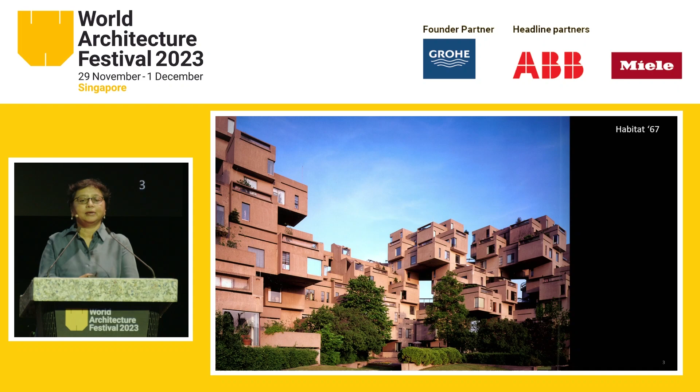We've been known since the early 1960s, when Moshe Safdie designed Habitat 67. We've designed many projects since then, convention centers, museums, big buildings, mega structures. All of them have been landmark projects, including our own Marina Bay Sands and Jewel.

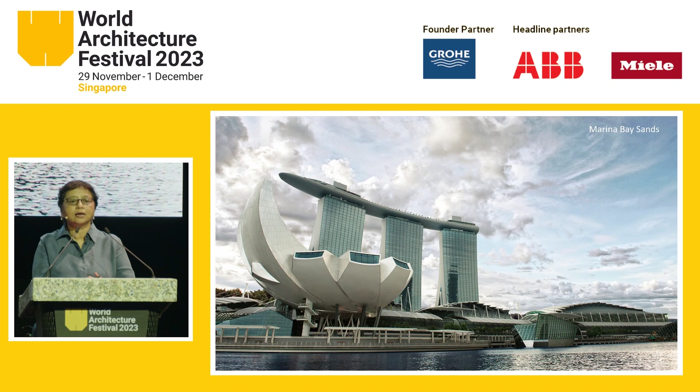I've been involved in many of these projects, and I can tell you, designing iconic projects is a real misconception. Because as you all know, clients come to us and say, hey, can you give us some wow spaces? Can you give us some Instagrammable spaces? Because that's now the in thing.

What we realize is that you can't really start designing by saying, I'm going to create this Instagrammable space. We are all architects and designers here, we know that when people come to us, they give us their design program. But if you think about it, that's such a single-dimensional information, because it's only their needs and requirements. That's a great starting point for design, but if you start with just that, you're going to get very limited.

So this is where I always think, what makes a building iconic? What is iconic anyway?

We always say, whenever you get something from the client, you have to take a pause. And what that pause means is you have to think about whatever you're going to design, how does that impact the land, how does that impact the environment, how does that impact the community. You have to really think more beyond the requirements. For us, it's almost an opportunity to come up with something innovative, to think outside the box, to think about more than what the functional requirements are.

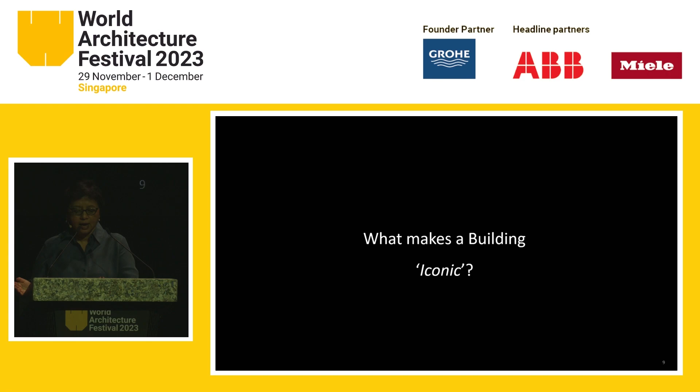And that has often led to very innovative solutions, even getting away from traditional design, coming up with new building typology, like what we did at Jewel Changi Airport.

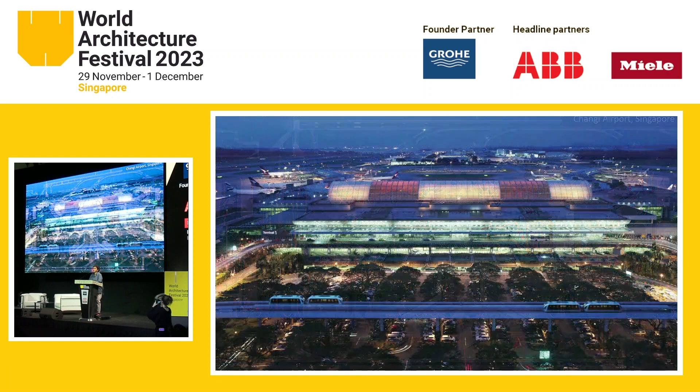At Jewel, the site was very tight. It was located in the heart of the airport, between the control tower, that's the red dot that you see, and Terminal 1. It was an open air car park with the train running through it. The train could not be moved, could not be changed.

Even though it was very challenging to design such a program for this tight site, we thought of the community, and we wanted to create a timeless attraction, an attraction which would be very natural, an attraction that would be loved by all.

We created this amazing garden around a waterfall. This garden is open to the public, open to the community 24 hours. There's no advertisement of that sort, it's a very pure garden.

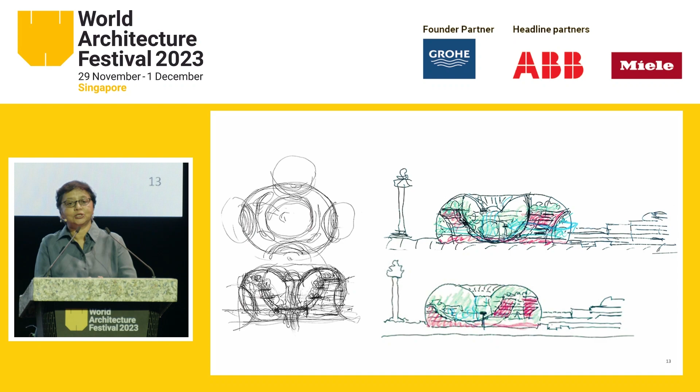The waterfall created new challenges for us. This was our ambition, but the waterfall created new challenges. The toroid structure could not be symmetrical, to avoid the water falling on the train.

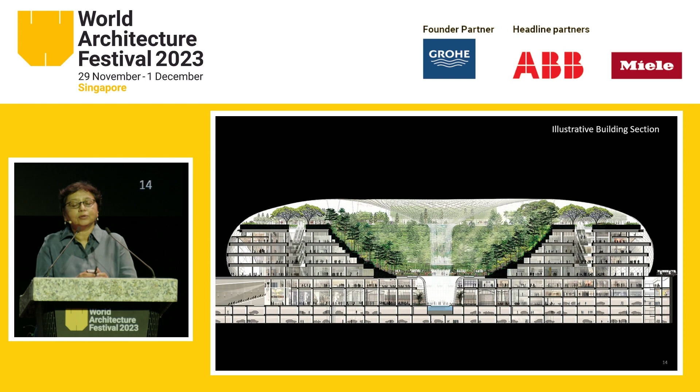We worked with our engineers at Buro Happold. They helped us rationalize the geometry, coming up with a beautiful, light, thin grid shell structure that could cover the space and the planting. We worked with environmental engineers to design the comfort for human beings, for the trees, and for the spaces underneath.

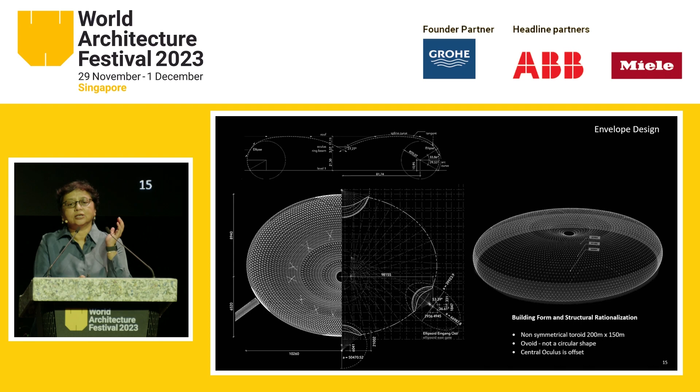The reason I'm telling you all these things is because you cannot do these projects in isolation. It's always teamwork. We work with the best engineers to come up with solutions that really help us solve the problems and come up with innovative ideas.

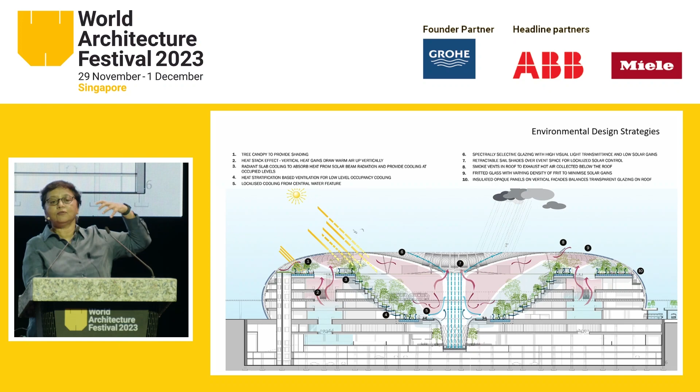Our environmental engineers also helped us map the sunlight, the daylight that would come into the building. That informed our landscape architects' selection of trees, what kind should be located where. At the top, we have canopy trees where there's a lot of light. In the forest valley, the little bowl that we created, we have tall trees allowing light to come through.

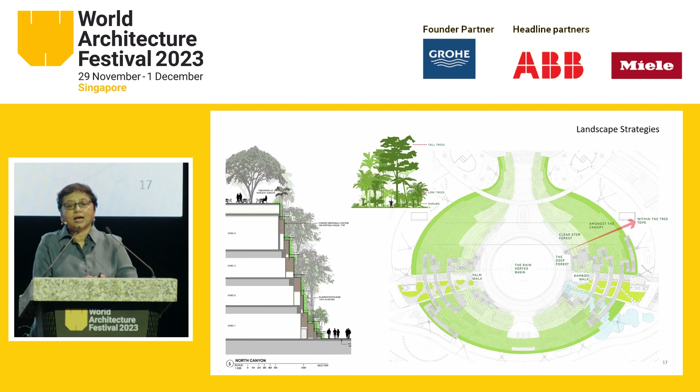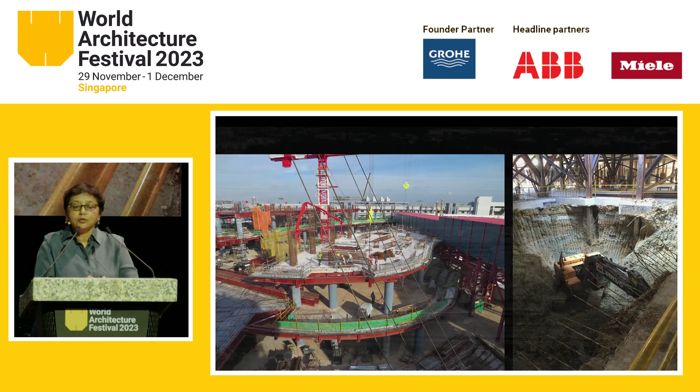Even though it was always a stressful process during construction, we always had this feeling that this was going to be something very special. We were building and designing something that was very unique. My team and I would go to the site every single day and really marvel at what we were creating, and even during the stressful process, there were moments of wonder watching everything coming together.

I would enthusiastically send progress pictures to Moshe in Boston to show what we were doing. And we were really eagerly waiting for the project to open, because until then it was just about us and our building.

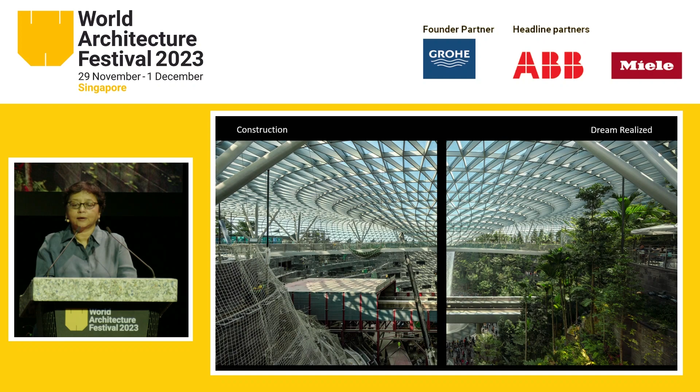We challenged the notion of an airport. We brought in nature in a public space in the center of an airport. This garden that you see is something that was never thought of. Changi never thought that we would have a garden inside the building. In the middle of the airport, we've created a community space.

This garden is not just a display of plants, a botanic garden, but it is a garden of wonder and grandeur. It has introduced people to the wonder of plant life. This garden and the waterfall inside really create this amazing serene atmosphere, which is unheard of.

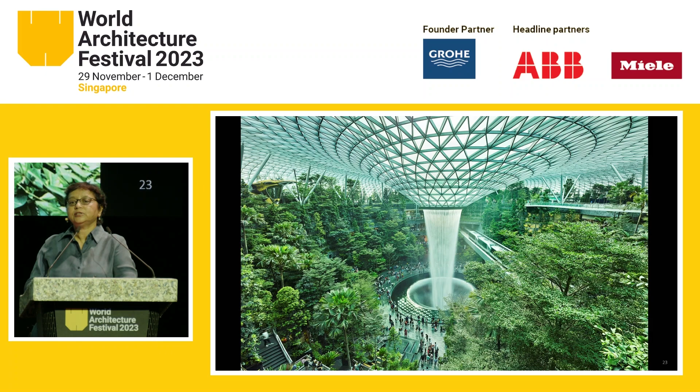This is a new typology that we've created, where landside aviation facilities, retail areas, and an attraction come together. We eagerly waited for this day to open.

And what we saw was amazing. This is the first building thing that people see when they approach the airport. When you come into Terminal 1, this is the first view that you get. And that itself has formed a new gateway to Singapore.

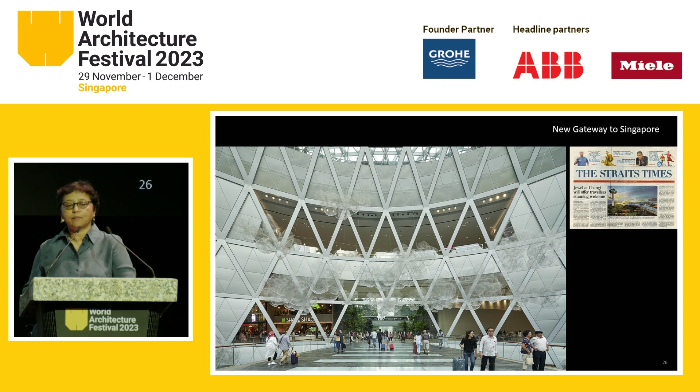I really remember when the building opened and thousands of people flocked inside the airport. They were taking pictures, and they were just marveling at what they were seeing. And we did anticipate that, because we've created something special.

We anticipated people to be very impressed by the scale, impressed by the surroundings. But what I did not anticipate was how this building would impact the people, how it would resonate, the space would resonate with people. It created a sense of wonder.

There was a joy on everybody's face. It's almost like it's not just that day—I've been seeing it over time. And it really has created a generational happiness.

When you see this light coming down from the sky, filtering through the trees, when you see the water falling from the oculus above, it's like rain. It's like being outdoors, not an indoor garden. And it's a magical moment when you see a rainbow in the water.

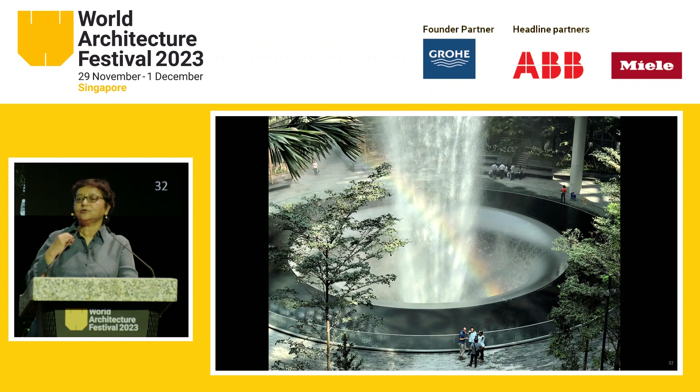You forget you're at an airport. And this is something that I've seen on people's faces. The space completely changes in the evening, becomes a magic wonderland.

Travelers are taking extra time to come to the airport, relaxing, and getting rejuvenated just visiting the place. Of course, locals are enthralled. The locals are so happy with whatever the space has to offer.

And it's heartwarming, really, to see people in wheelchairs, senior citizens enjoying the garden and really sitting peacefully. And I've heard them say that it feels as if the project has been crafted for their needs, because their families don't have to worry about them.

To the point that a few years ago, the New York Times wrote an article saying that people should spend a day vacationing at Jewel. I mean, that's what the impact has been on people.

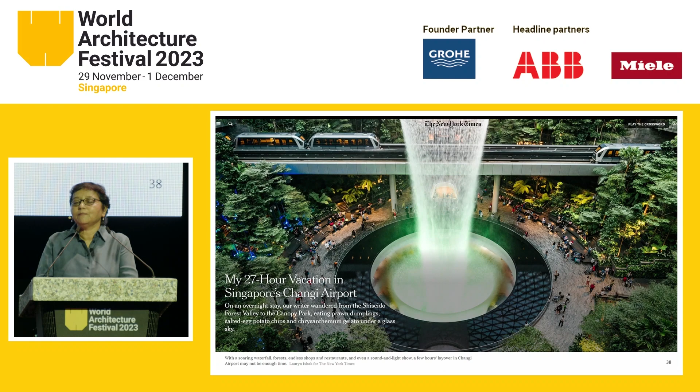Even today, people and the community have made it their icon. It has become their symbol—symbol of Singapore, symbol of the airport.

You might say, hey, it's a very special structure with special needs. So how do you create something like that, something where people feel that they belong to the space, on big projects—especially if the project has theaters, casinos, convention centers, and hotels—a mega project?

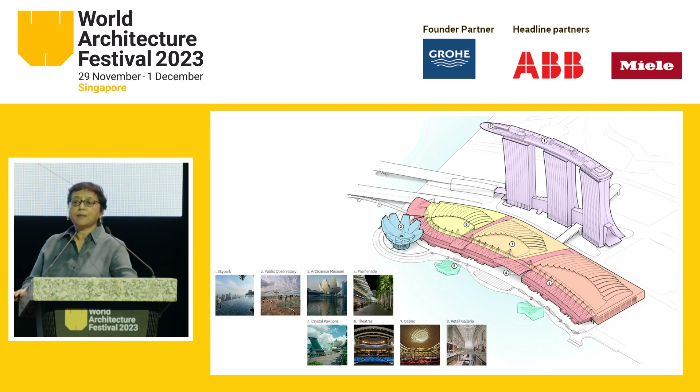Marina Bay Sands is an example of that project. Marina Bay Sands is a great example of integrated urban planning and architecture. It is a microcosm of a city.

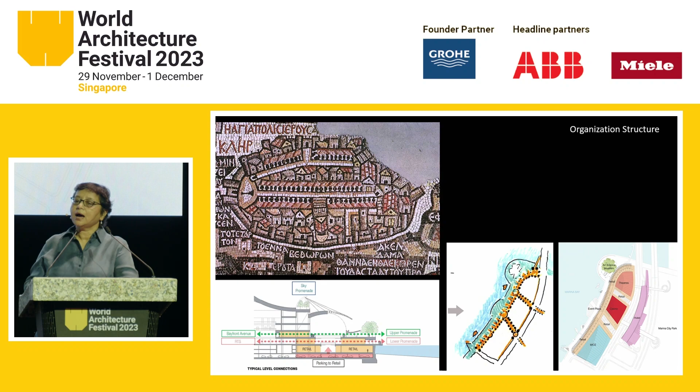We've been inspired by the concept of Roman spinal cities. The commercial hub of Marina Bay Sands, which is the casino, the theaters, the convention center, and the related spaces, are self-orienting. Our design seamlessly integrates the spaces with the surrounding urban environment, extending the city life both within the building and around the building.

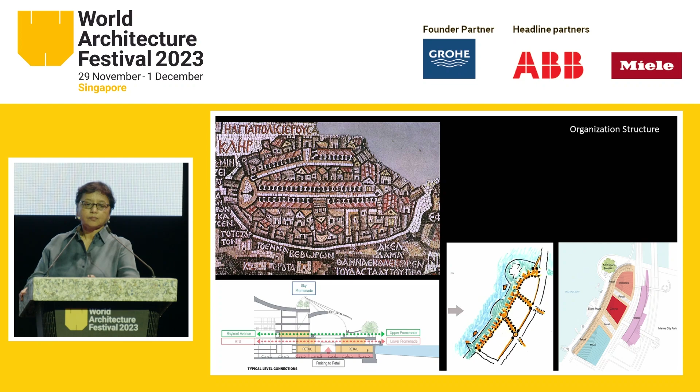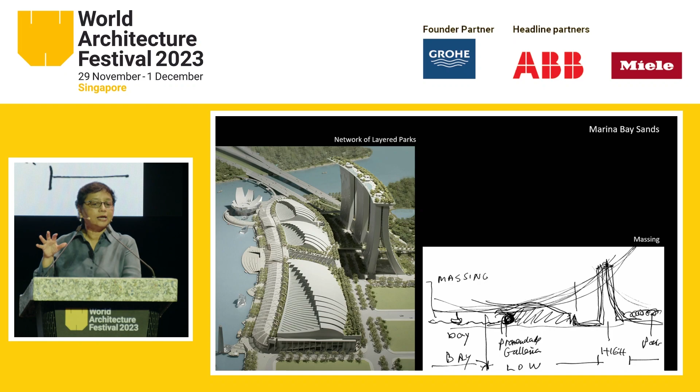The massing configuration of these facilities really creates a three-dimensional hierarchy, addressing the issue of mega scale, and creates an urban landscape that relates to human scale.

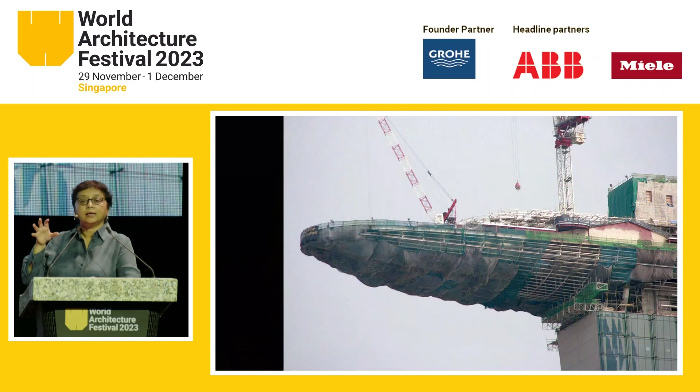When we started the construction, even we were overwhelmed. We had worked on this project for a year, and we were overwhelmed by the sheer scale of it. I often wondered what people would think of it, even though we had designed it in a way that could relate to human scale by separating these buildings, by creating these independent structures.

But since the day it opened, over time, Marina Bay Sands and its public spaces have been seamlessly integrated into Singaporeans' lives. It attracts both locals and tourists. We designed public spaces integral with the architecture, integrated with landscape and natural light. These are spaces where people come in, Singaporeans and tourists, a gathering place for day and night with various activities and attractions.

The waterfront promenade is one of the spaces. The design was such that the adjoining buildings you see were always lower in scale, for really connecting with people, and transparent, so that the inside retail mall and the outside promenade would be one.

This space is so popular. Whether it's hot sun or raining, people come over here. They flock together - it's almost like a gathering place for families. People come here and relax. There are joggers, bicyclists, using the space to really connect. It connects well to the city.

In the evening, it's a completely different space. It transforms into a hub where locals and tourists come and enjoy the various food offerings and attractions. We had never anticipated movie premieres in the space. There are fashion shows, there are durian parties. Even the ArtScience Museum, with its sculptural form, is used for projecting digital displays.

The art pieces, like Ned Kahn's Vortex, are very popular. People are mesmerized by seeing the swirling water. It is kind of a place to be - you see families sitting, relaxing, looking at the stunning Singapore skyline.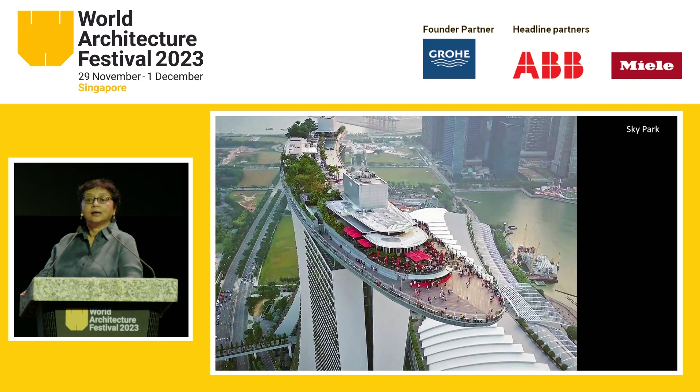In addition to this, we created another public space, the Sky Park - a 2.5-acre public space in the sky. The swimming pool, the observation deck, all these spaces are loved by everyone. The swimming pool, 150 meters long, spans from Tower 1 to Tower 3, and is the biggest attraction. People from all over come here just with the aim of swimming in that pool.

At sunset, finding a spot in the bustling crowd is a problem. It becomes a challenge, right? People wait for hours together just to capture the color of the day, color of the evenings, of the sky. It's worth the wait - it's a magical transformation to see the change in the cityscape.

It's really my favorite time to visit the Sky Park. Whether you're there looking at the lights of the city, or to take pictures of the fireworks, it's a must-see place. If you look at all tourist books and guides, it's a must-visit place, and I think that's what's made it very successful.

People love being there. People feel that it's their space, because you don't even have to be a hotel guest to go and see the observation deck. And who would have imagined, really, doing yoga in the sky?

This Sky Park has changed the way Singapore thinks about rooftops. It has been a game changer, really, to see how people could use spaces in the sky, which otherwise were taken up by mechanical equipment and other things.

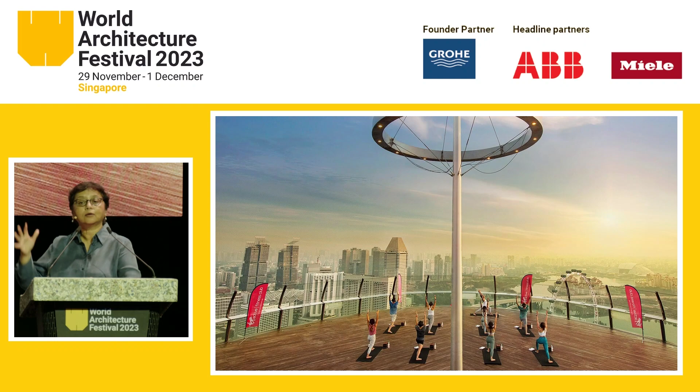Marina Bay Sands, as you all know, is a global phenomenon around the world and known as a symbol of Singapore. It's also an example of how architecture can be a catalyst for economic growth and change.

These are all commercial projects. There is a case - I was talking to a friend, and he said, oh, it's easy because these are commercial projects, you can create public spaces. His logic was that you can convince developers - maybe it's easier to convince developers to say, why can't we include some public space? It's going to increase the footfall, help you financially, and help get more people into the mall.

But as architects and designers, when we work in cities like Singapore, which are densely populated, it is important that we create something beyond what we have been given. It is important that we think about the community, the neighborhood. And that's exactly what we did for our office building, a headquarters for a local Singaporean company, Surbana Jurong.

They chose a site away from the CBD area for the headquarters. We created a dynamic anchor project for the Jurong Eco District, Innovation District, intended for both the employees and the surrounding neighborhood and the big community. The whole idea was to foster a getting together of people.

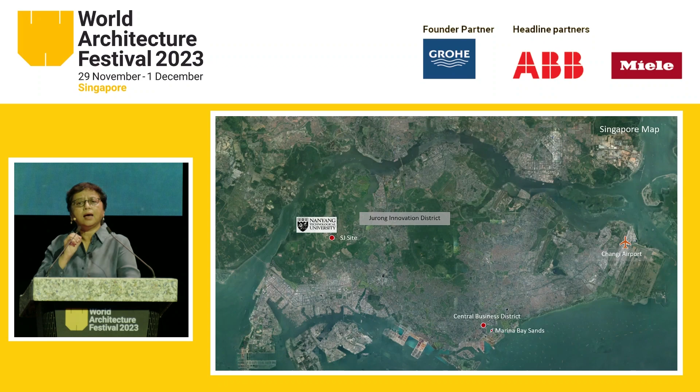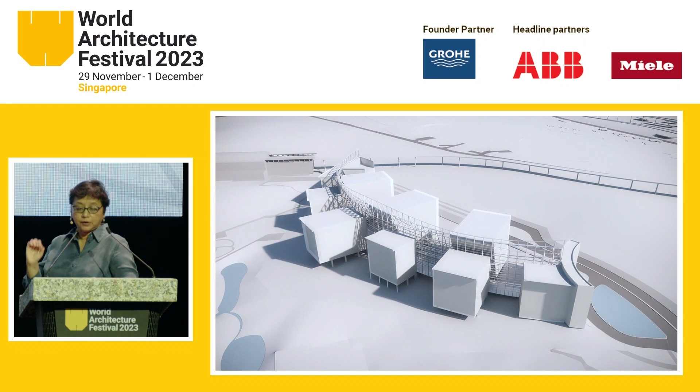The whole idea was allowing people, allowing the community to go through your building. We created a spine, a central spine that forms a direct connection between the train station you see over there, a public train station, and the neighboring community. It's a public street. This spine also connects the different office blocks and interweaves exterior gardens and interior gardens.

What you're seeing over here, there's something called the Eco Garden that already exists. So what we did was we brought the garden into our building. This clustering of medium-sized volumes around the spine really evokes almost an atmosphere of a village.

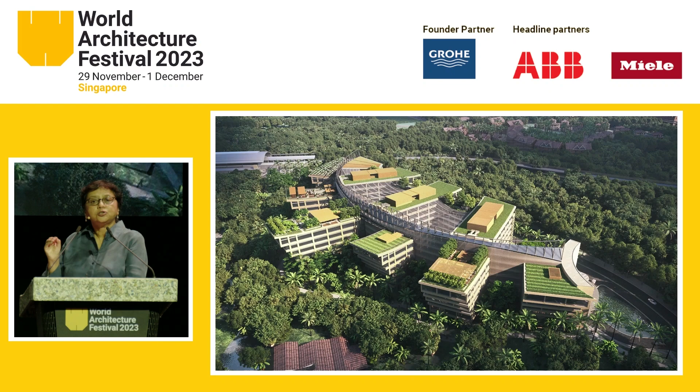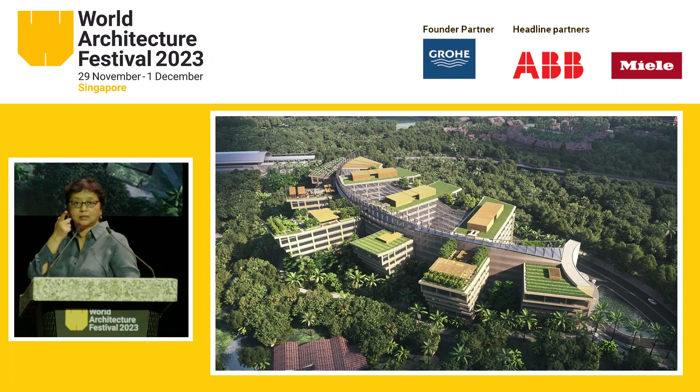It's a contrast to what people think of headquarters. Headquarters generally in Singapore are offices located in tall towers in the CBD area, in the dense, central business district. Our building is simple. Our building is something that has been there.

This is welcoming. This just opened 6 months ago. They welcomed the residents 6 months ago.

We designed the elevations that could relate to the future projects. Since this is a pioneer project in that area, we designed the western elevation to relate to the future projects over there, while the eastern cantilevered blocks, the stacking of the blocks, allows gardens to penetrate through and grow around it, almost creating a treehouse effect for the employees inside.

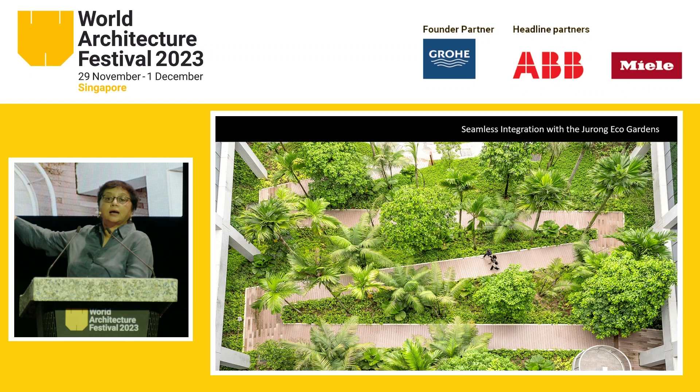One of the things I must say is that although it almost feels like you are working in the garden, each office block has abundant sunlight, abundant natural landscape, and abundant views outside. There's seamless integration of the little gardens we created between the towers, and seamless integration with the neighboring eco gardens.

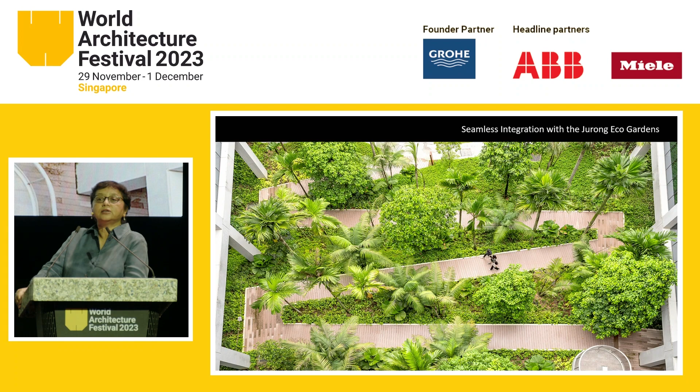We designed bicycle paths and infrastructure to support active mobility, not just benefiting the employees of the campus but also the neighborhood. We tried to save as many mature trees as possible on site, and created special courtyards that would bring natural light inside.

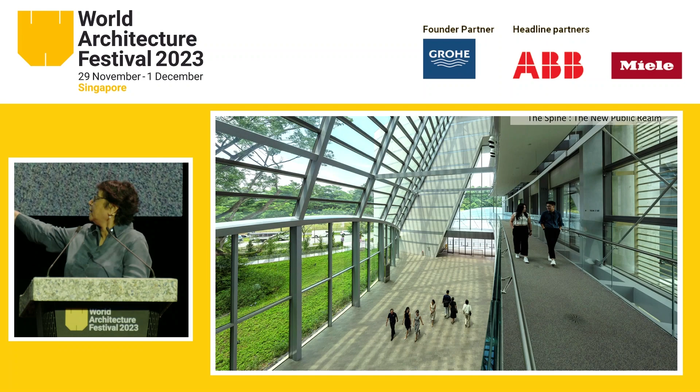What you're seeing over here on level 1 is a public pedestrian street inside the building, and on the higher levels in the spine are the private offices of Surbana Jurong. This street connects blocks, connects gardens, and connects people, because it has almost become a gathering spot for people to come and talk together.

On level 1, we have the garden where the public comes and sits, and enjoys. On the higher levels, we have the Surbana Jurong community enjoying the space.

The campus design really believes that everyone should have abundant or optimum daylight and optimum access to light and nature. Thus, we have been advocating for a more balanced and collective work atmosphere that would be less stressful and more creative. We managed to get natural daylight to filter through informal community spaces inside the building.

Surbana Jurong campus has been designed keeping both Surbana Jurong employees and the greater neighborhood in mind. These are spaces where everyone enjoys. We have public amenities on level 1, like cafes that can be used by anybody. We have a mother's room, childcare, a clinic, and a gym accessible to all, the whole neighborhood community. And I think that's changed the way the company works.

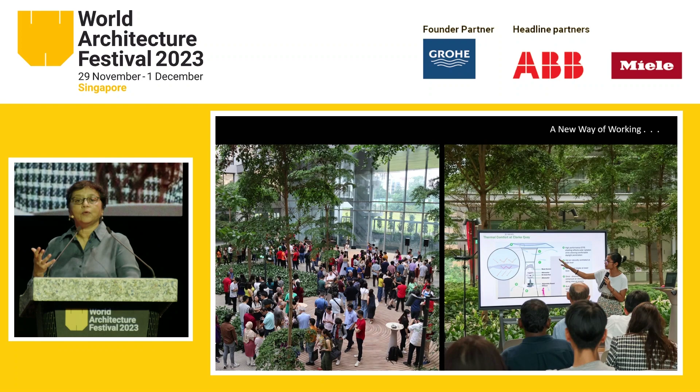It's a new way of working.

It's a new way of enjoying. And the offices that we've created in the gardens are so inspiring that they have become very flexible spaces, ad hoc gathering spaces. There's a lot of cross-pollination of ideas.

In addition to taking care and supporting the wellness of the 4,000 employees on the campus, we have also created community gathering spaces like this, a multipurpose hall which also has a sunken garden bringing in daylight. The campus has been designed really for everyone, not just for the Surbana Jurong community. This is an example of how even an office block can be connected to the neighborhood and not just built in isolation.

It has impacted the management's way of thinking. They are now committed to creating a nurturing environment, not just for their employees, but for the greater neighborhood.

The buildings that I have shown you today have a lasting impact extending beyond just the users or the visitors and the local community. They serve as cultural landmarks and gathering places. They foster a sense of identity and pride amongst residents. They have become iconic symbols of Singapore, drawing tourists, drawing locals, impacting and boosting the economic and culture of the city. Because we truly believe architecture is more than just mere functionality.